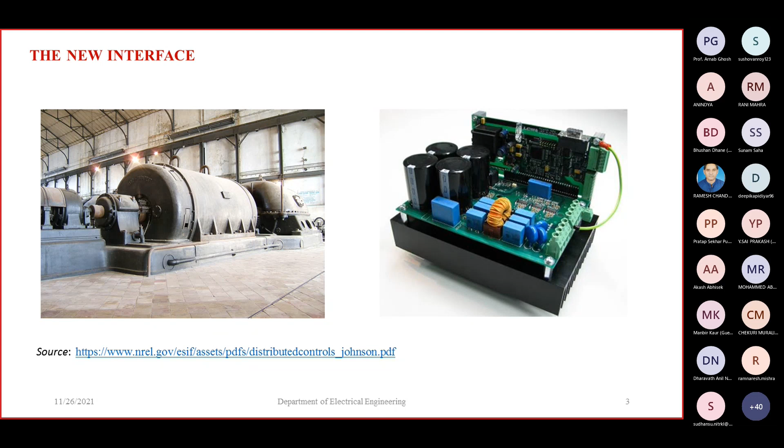So the new interface is, we will replace the synchronous generators with these inverters, but the rating of the inverter—now I'm showing the scaling. In conventional synchronous generators the rating is very high, for example 210 megawatt, 500 megawatt, 1000 megawatt. But the rating of the inverter is almost 1 megawatt to maximum 2 megawatt. So we have to scale those things to match the

rating of the system, and location. We know the location of the synchronous generator in conventional power system, and the inverter's location is near to distribution, at low voltage and medium voltage distribution level.

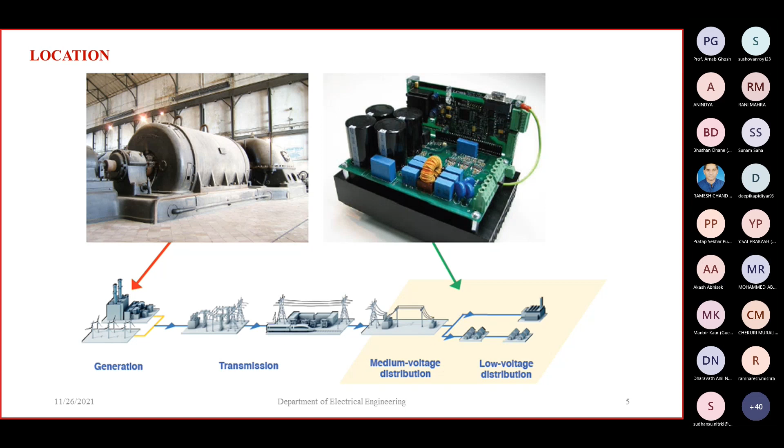Coming to implementation of the inverters, here you can understand the implementation. After the filter we can measure the voltage and current signals, and the analog to digital converter will convert the analog signal into digital. The microcontroller will process the signals and give the pulse width modulation signals to the power semiconductors, giving the desired amplitude and frequency at the output of the inverter.

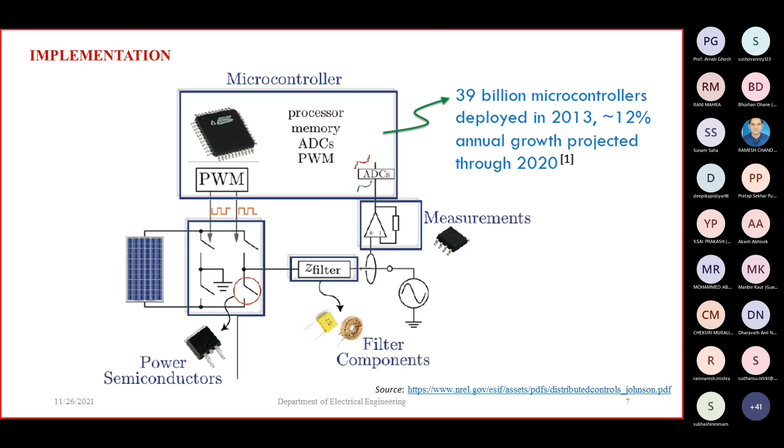Before going to droop control, I will first explain the inner voltage and current loops, which are very important. There are two types of inverters: grid following and grid forming. Nowadays the government is giving permission only for grid supporting or grid following inverters. In grid following inverters, there is just one PLL, which gives information regarding voltage, phase, frequency and phase angle. Accordingly, it injects some desired active and reactive power into the grid.

But in future our inverters will dominate the synchronous generators, so we have to form a grid using these voltage source converters or voltage source inverters. Now I am talking about one islanded inverter: how the current loop will work, how the voltage loop will work, and for parallel operation, which control method we will use. I will explain those things.

From figure 2, you see this is just a three-phase voltage source converter with LC filter. Here LF is the filter inductor and CF is the filter capacitor, and RF is the on-state resistance of the switch, ohmic loss of the inductor and ohmic loss of the switch, and this is the DC supply.

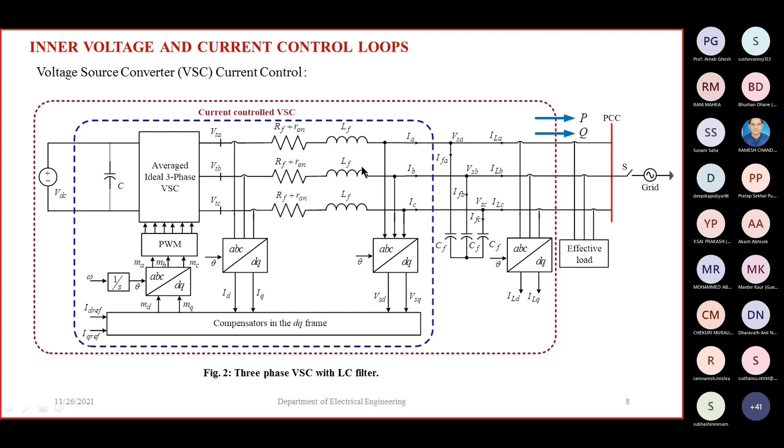First I will explain the current control loop. Applying KVL across the three-phase filter inductor, we can get equation 1. Here the terminal voltage is VTA and the PCC voltage is VSA. Applying KVL, VTA minus VSA equals LF into dIA by dt plus IA into the equivalent resistance. You can see this in equation 1.

Then we transform these equations from ABC to DQ frame. We do this because the PI controller is not able to follow a sinusoidal reference without error, so we would lose the simplicity and robustness of the PI controller. That's why we transform ABC to DQ. In the DQ frame, those signals are DC, so we can utilize the PI controller easily. Equation 2 shows equation 1 in the DQ frame.

After performing Laplace transform on the equations, we get equation 3. Equation 3 shows the physical system equations, and equation 4 shows the control law. This control law you can understand from the next slide, the current control block diagram. I will briefly explain how this control law is designed and why we are taking these equations, and the relation between input and output in an inverter: V equal to M into VDC by 2.

Like in a buck converter we know the output is D into VDC, V out equal to D into V in. Similarly here also the output voltage is equal to M into VDC by 2. M is the modulation index.

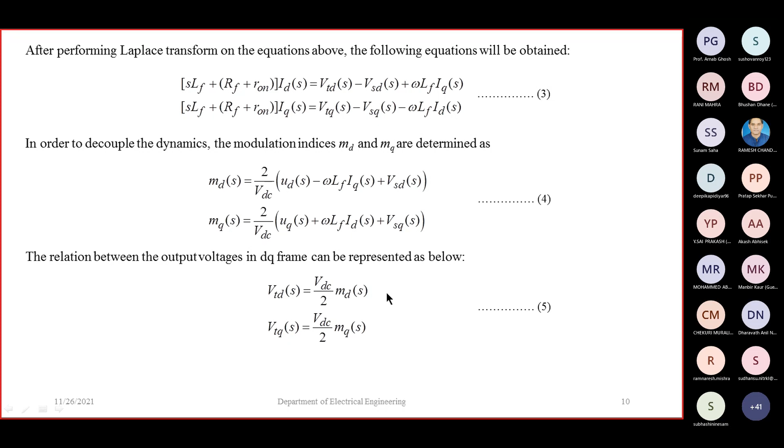Figure 3 shows the control block diagram of the current control voltage source converter in the DQ reference frame. The red box shows the physical system, AC side dynamics. I already showed how these equations came: first we apply KVL, then transform into DQ, then apply Laplace transform. From these equations you can see ID is depending upon IQ, and IQ is depending upon ID.

So there is a coupling between the state variables, and we have to eliminate that coupling. The controller can do this. In the control law, the decoupling term is there.

Actually, the controller will give one control signal. You can see the PI controller here. It will give one control signal, but we are adding two feed forward schemes. One is one feed forward scheme, and the other is another feed forward scheme. So in this control law we are putting two extra terms: one is the decoupling term and another is the disturbance term.

VSD of S is the disturbance. For example, if some load is changed, VSD will change. Because of this feed forward path, the controller can immediately understand something has changed, so it can act immediately. By this feed forward technique, the response of the system is fast. If you remove this term and run it, you can understand the difference between with and without the feed forward term, and how much time the system response will take.

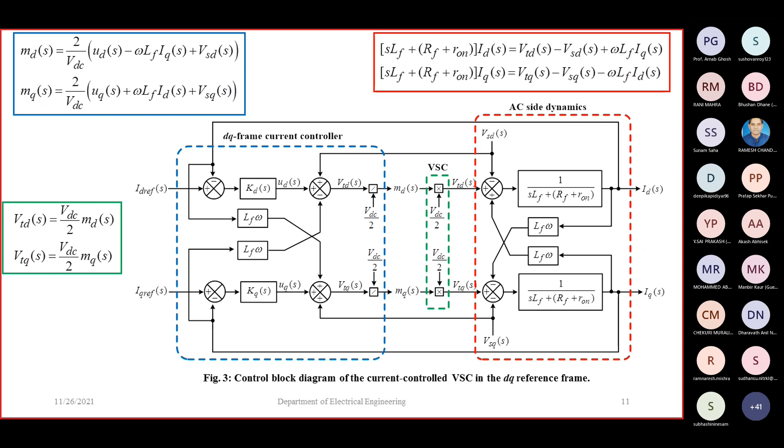As I told you, the multi-input multi-output system becomes two individual single-input single-output systems. In the next slide I will explain how to design these compensator parameters. You can see KD and KQ here, the two PI compensators.

Hello. Okay, you please carry on. Okay sir, okay sir.

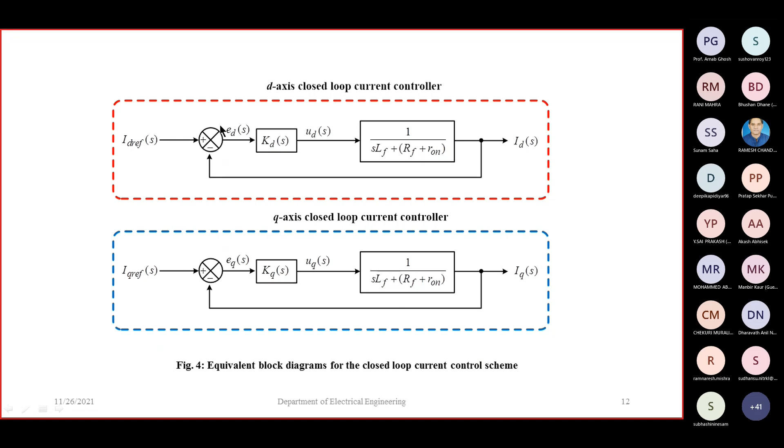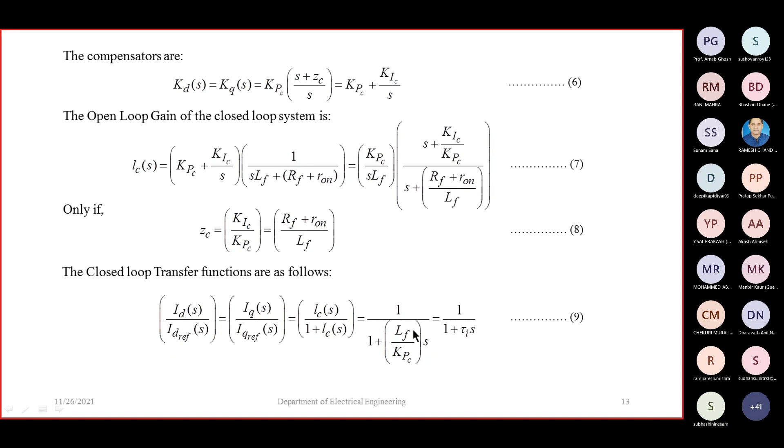So KD and KQ are the PI compensators, those are KPC plus KIC by S. The open loop gain of the closed loop system, you can see here, you can understand this is the open loop gain of this closed loop system obtained from this system. And the closed loop transfer function of the system you can see in equation 9. Here, the relation tau I is LF by KPC. So the KP and KI values depend upon the filter parameters and the time constant of the system.

Tau i is LF by KPC. Typically the range of the time constant is 0.5 to 5 milliseconds. Suppose LF is 8 millihenry and the equivalent resistance is 32 milliohm, and tau i is 1 millisecond. Now you can see KPC is equal to LF by TI, so the KP value is 8. And KI we can get from RF plus R on by TI, so the KI value is 32.

So based on the filter parameters, we can get these KP and KI values. I think you understand these KP KI values in the current control loop.

Now I will go to the next loop, the voltage control loop. Here the ID reference and IQ reference come from the voltage control loop. Now I'm going to explain about the voltage control loop.

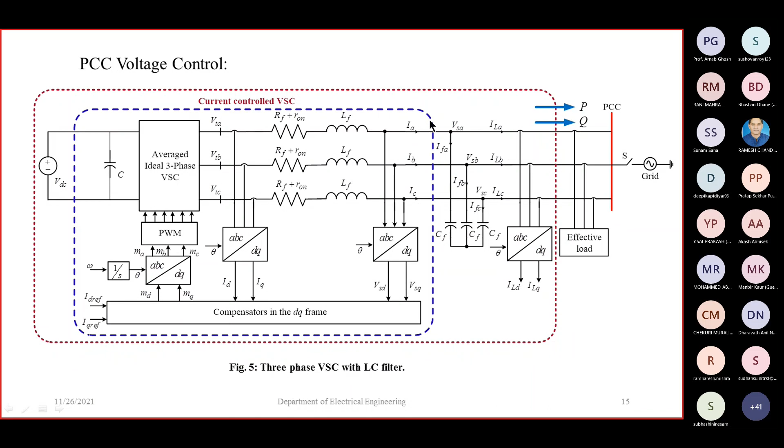Here is the same diagram. I am applying KCL at the three-phase AC filter capacitor. Apply KCL here: IA equal to IFA plus the load side current ILA. So IFA equal to IA minus ILA. The IF is CF into dV by dt. We know all these basics. So similarly here also we can get these equations in ABC frame.

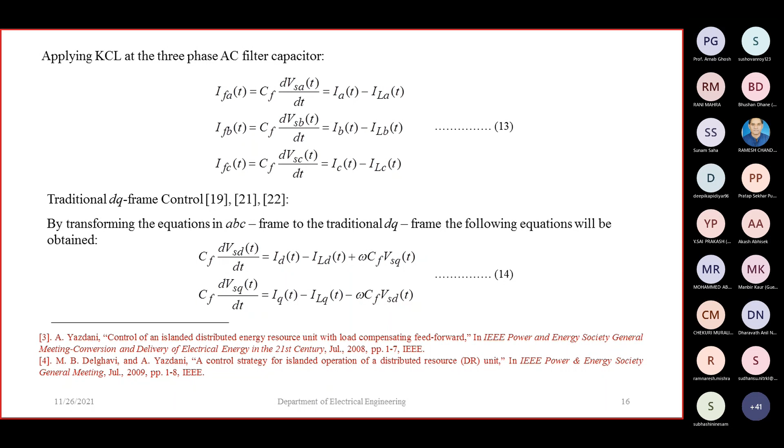Now we are converting ABC to DQ, and in the same way I'm designing another control law to decide a specific voltage and frequency.

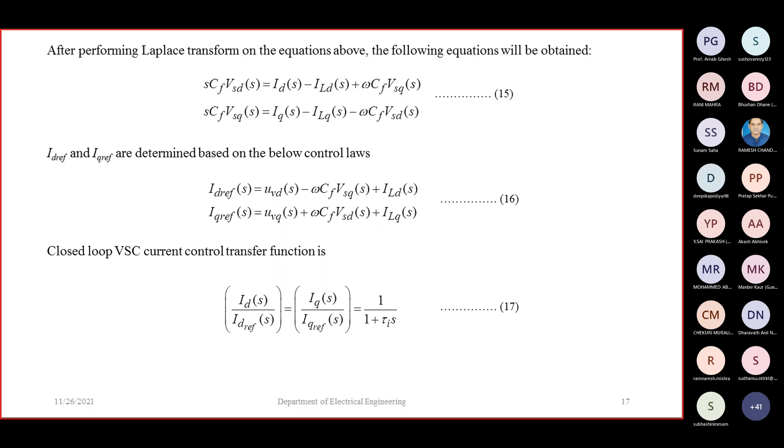Similarly, we already derived the closed loop voltage source current transfer function in the previous slides, which I have taken here in equation 17 - the same block diagram. Here also, this is the physical system, the AC filter capacitor dynamics.

So here VSD and VSQ are coupled. In the physical system, there is coupling between the variables. So you can see here also I'm eliminating this coupling term.

Then I'm adding another feed forward scheme. If ILD changes - for example, the load is increased or decreased, something happens on the load side - it can immediately understand this because of the feed forward scheme, so the system response will increase. The feed forward scheme is like I explained in the current control block diagram - here also the same thing.

This closed loop voltage source current control, already derived in the previous slides, I am directly putting this here.

How to derive this control law of the voltage control we can understand from here: a normal controller would just give the control signal UVD, but here we are adding one or two more elements to decouple. Decoupling means the multi-input multi-output system becomes individual single-input single-output systems, and because of that, this feed forward scheme improves the system response.

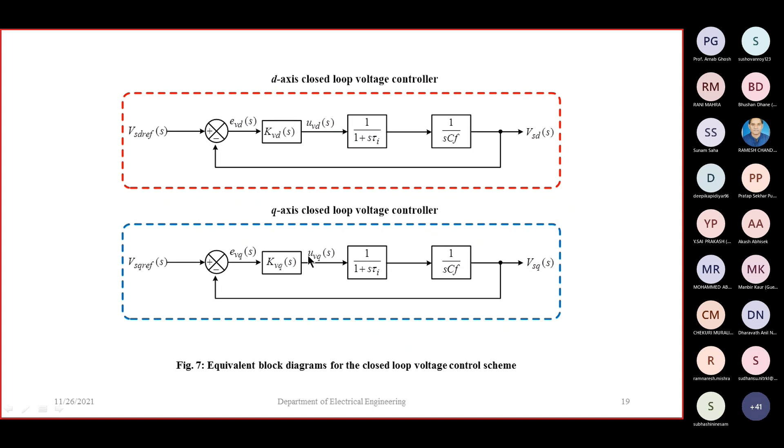Same way as the current control scheme - now this is two individual single-input single-output systems. Here also two PI compensators are there. I will show how to design these compensators in this slide.

These compensators are just KV, a proportional compensator only. Why am I taking only a proportional compensator? Because you can see the closed loop transfer function of this system in equation 19 - there is one pole. The open loop system already has one pole at the origin.

So it is more than sufficient for the compensator to be a pure proportional compensator - no need to go for a PI compensator, though if you want to design a PI compensator also you can, no issue. And we cannot use pure integral, because with pure integral, 1 by s square, there would be two poles at the origin.

The closed loop transfer function of the system you can see in equation 20 - here you have the transfer function. If you know the TI value and CF value, you can get a transfer function with some constant K. By using the SISO tool, you can get this K proportional constant.

By using the SISO tool you can draw, for example, a root locus. In root locus, if the gain varies from 0 to infinity, the characteristic equation poles will vary from one point to another. If you want a particular pole location, you can vary the KV value and keep the poles at that specific point, then take that KV value. By using the SISO tool, you can design this KV value.

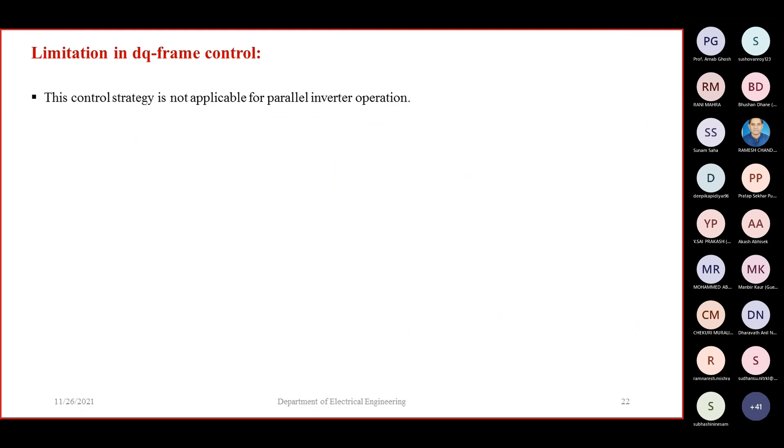And these are the results I will explain from my simulation. After simulation, I will explain the droop control. First, now I am going to show how to do the simulation up to the voltage and current loop. Then first I will explain those things.

I think if possible, you can also open your MATLAB and try it, and it will be good for you - you can understand it easily.

Now I'm opening the Simulink library - these are my components. First I will show how to design a physical system in MATLAB. First I need a DC voltage source. I have added this DC voltage source to my untitled model - yes, you can see here, this scheme.

And now, the next block is universal.

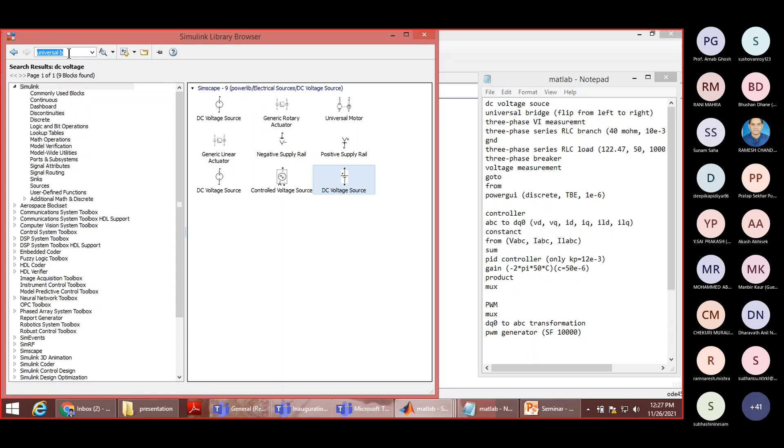Yeah, this is universal bridge. I'm using it, it will act like a three-phase voltage source converter.

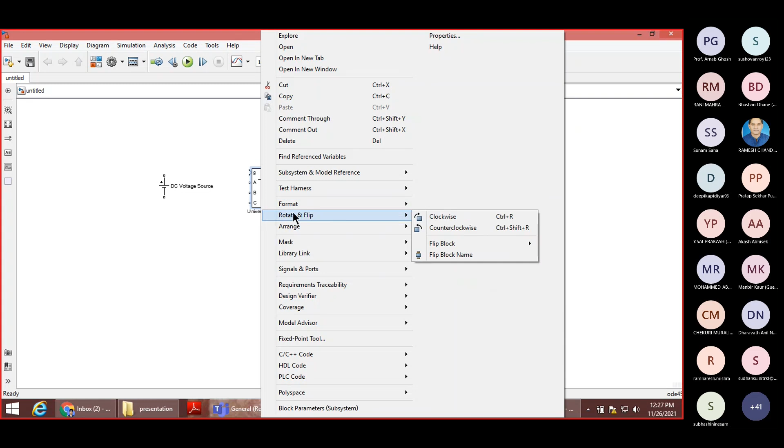Just flip it. Flip this block from left to right. Now I can easily connect these things.

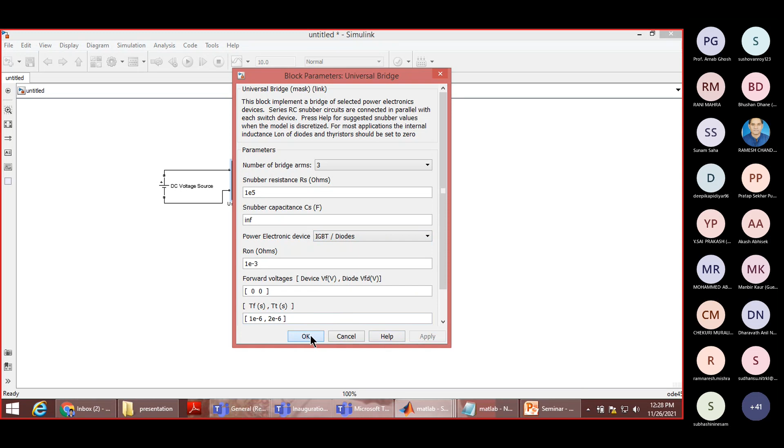Here there are 3 arms, and the power electronic devices, I will use the IGBT diodes. I will give the pulses here. Then I will use an LC filter. Then I will connect one breaker and apply some load.

Okay, now we have to design a filter. This is my simulator for the filter. Before that, I will use one three-phase measurement, a three-phase VI measurement.

And I need a three-phase series RLC. This RLC branch will act like a filter, and we need an RLC load also, and this block also.

And so we need a ground terminal also. Yeah, ground is here. I'm adding the ground, and I have taken the RLC load, and a three-phase breaker.

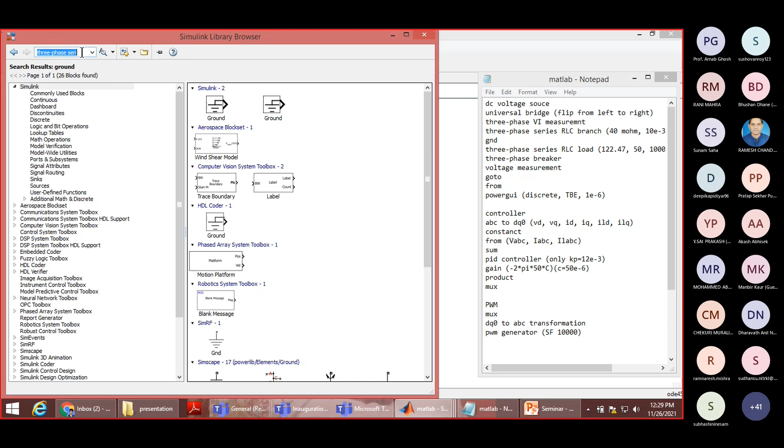We need a three-phase breaker, for adding and removing the loads we are using this three-phase breaker.

I have added this block also. Then I have one voltage measurement.

I need this block also. And then we need a goto, and I require this from also.

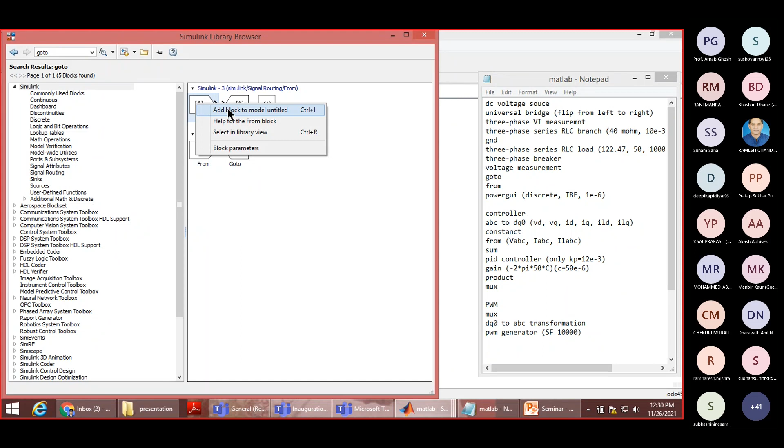These are just signal routing. And we need a powergui also. I'm adding the powergui also, yes, for the first time.

I need a breaker. I need a ground. At the terminal, I want to measure the VT and IT.

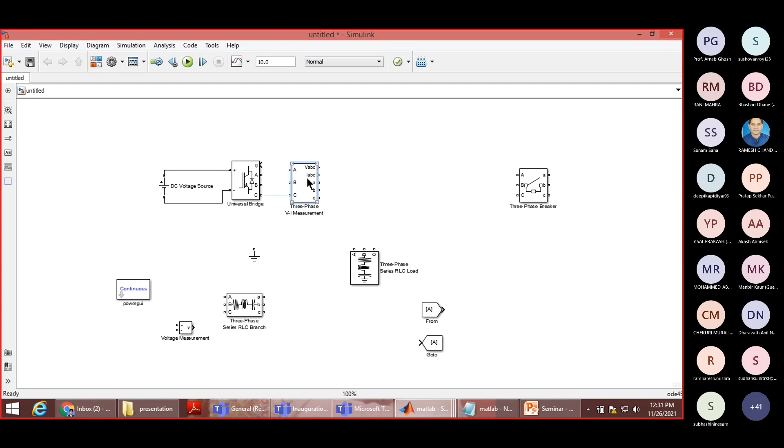So that's why I'm giving, I will use a label, some VT, and I will use a current label, some IT ABC. So at the terminal, that's why I'm giving IT and VT.

Now I'm connecting the three-phase VI measurement block. It will give the three-phase voltage and current. Here you want phase to phase or phase to ground, you can select here. So I'm using just phase to ground.

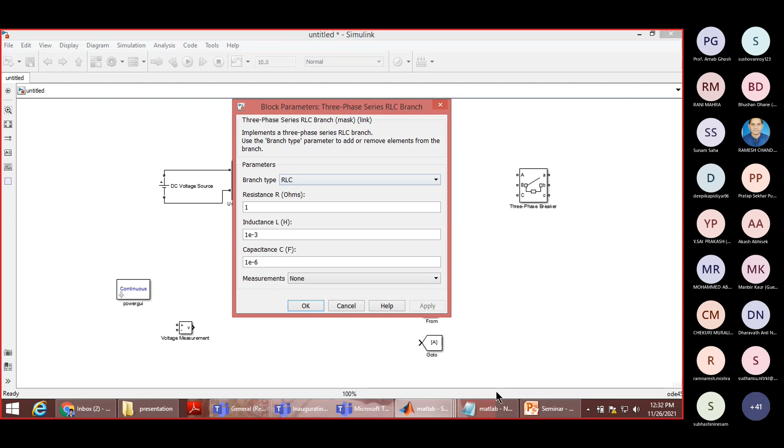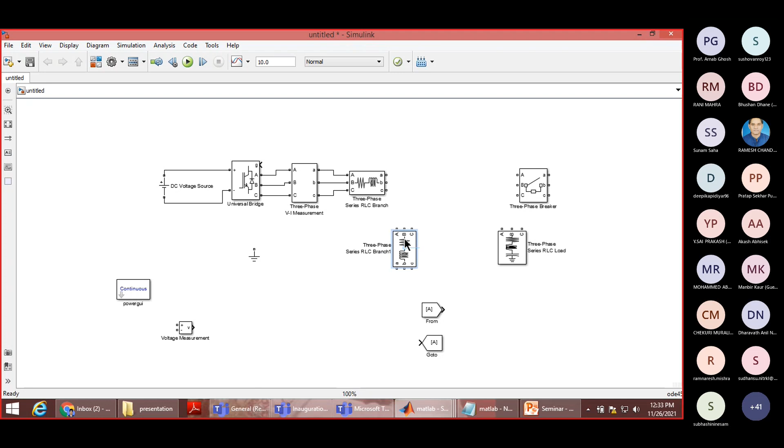Okay, I'm connecting this filter inductor with the equivalent resistance. Now this is the load. Now I will take another block for the capacitor, the filter capacitor.

This ground is required first to ground this. Okay, the filter inductor is over and filter capacitor is over. Now I connected the filter inductor and filter capacitor.

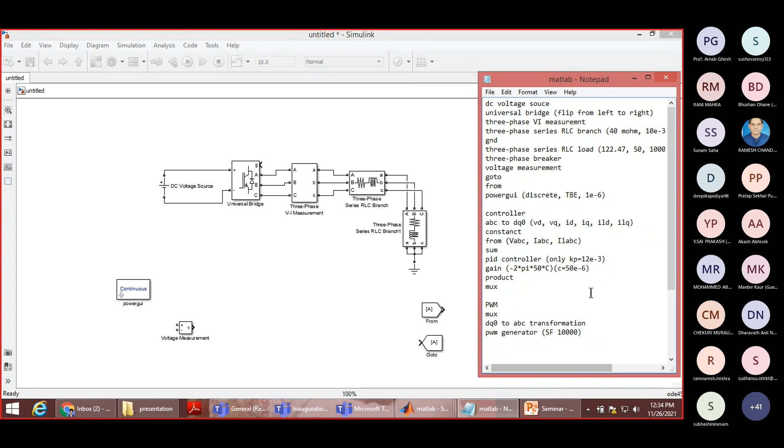The filter capacitor values are how much? 50. I consider a small resistance also, here also I'm considering just some 5 milliohm, and this is I think 50 microfarad. So yes, RC is just resistance and 50 microfarad, and the resistance is just I'm considering 5 milliohm parasitic resistance.

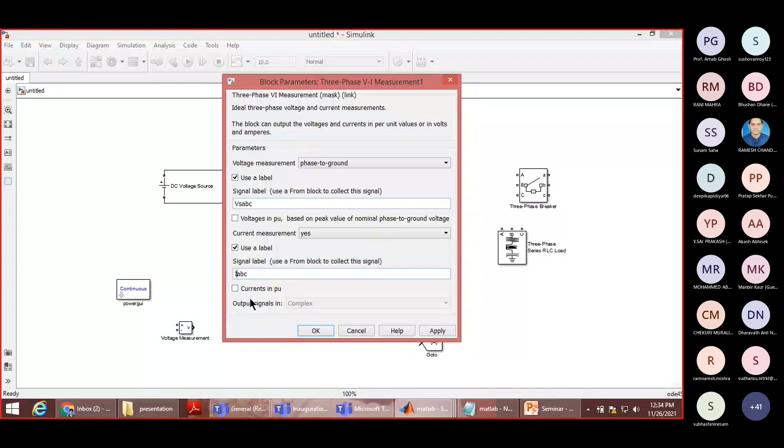And then I need one more VI measurement for the load side or some secondary side. Okay, VS ABC and IS ABC. So it will give the load side, or at the point of common coupling, it will give the voltage and current.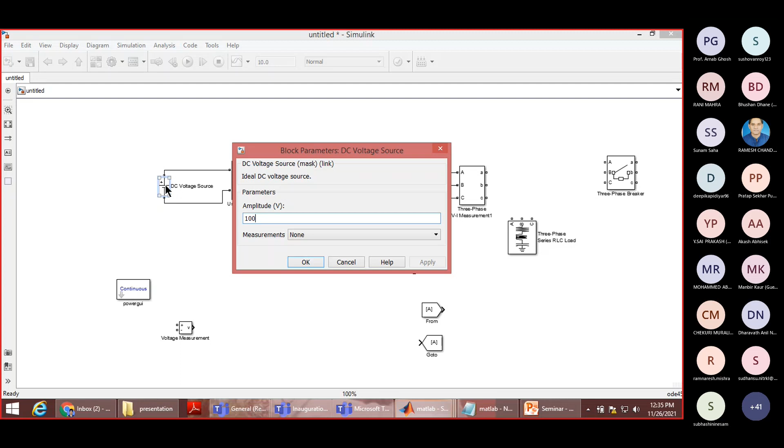Yeah, I have connected this block. Then we will connect the load. For the load, I'm just considering the output voltage is just 100 volts. For that I'm considering just 240 volts DC supply, and the load parameters also.

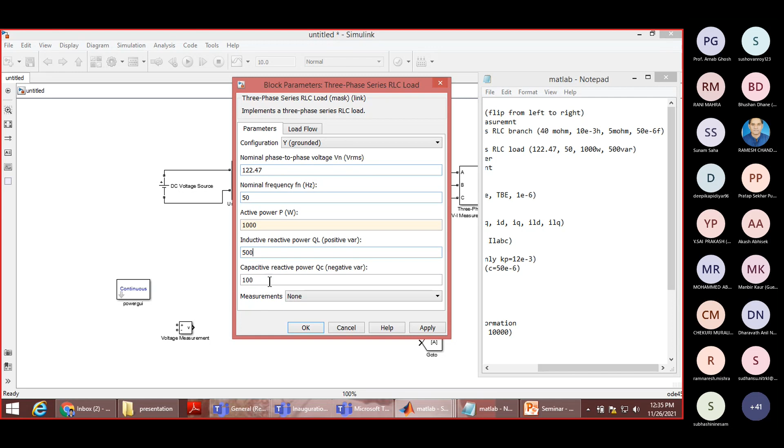Yeah, this is my load. A to A, connect A to A, B to B, C to C. Then I'm using a three-phase breaker.

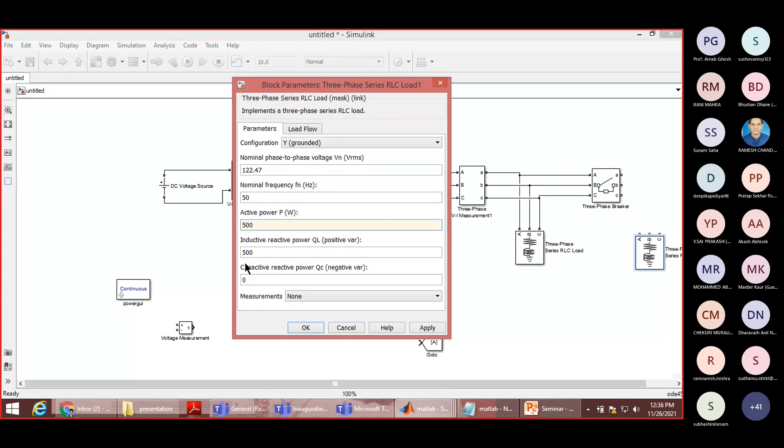Yeah, the three-phase breaker will be useful, it can break and take the load, and otherwise it can add the load also. I'm adding some 500 watt, some 250, so it's just a 50% increase in load.

I want to add this load after, for example, I started my simulation and it is running at 0.3 seconds. I want, for example, at 0.5 seconds to add this load, so you can set the time. Initially it is open, if it is closed, initially closed. So I am putting it as initially open.

I'm giving the time at, for example, 0.4 second, extra load will come, and again at 0.6 seconds the load will be gone. In between that time, on the secondary, the right side of the breaker, some load is there that will come at 0.4 second and disappear at 0.6 seconds. So initially it's open, meaning the load is not connected initially. After 0.4 second it will be connected, and after 0.6 seconds again the breaker will open.

That's it. You can give the external signal also. If given, some external signal will come, so that if we are giving that external signal, the breaker will turn on and off based upon the external signal. Now I'm just internally generating two signals to turn the breaker on and off. Yeah, that's it.

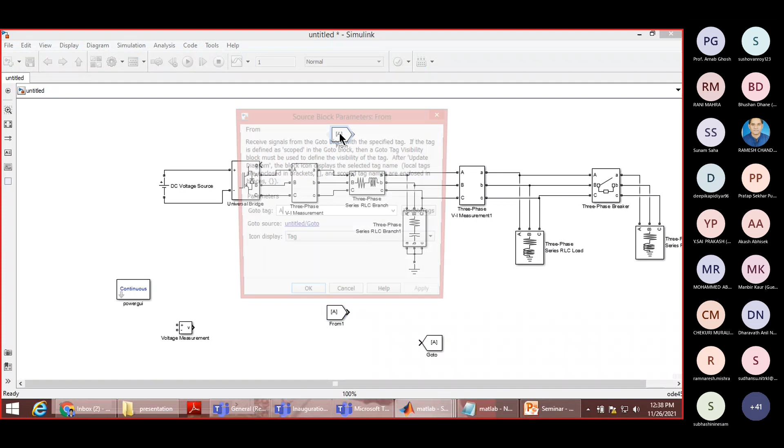I think this is a physical system. I want just one second. Yeah, so this is the physical system. Now I have to give this... now I want to generate pulses. Pulses, okay.

Now I will discuss the controller, how to design it. In the previous slides I explained the feed forward schemes: one is the load side voltage we will detect, and the load side current we will detect, and we will use those sensor signals also in the controller.

And initially for islanding mode, you can fix, for example, in this mode I want some 100 volts, the V phase max is 100 volts on the output side, so I'm expecting 50 Hz. The V phase max is 100 volt that I'm expecting. For that I need to design a controller, so we need a current control loop and voltage controller, the inner current controller and the outer voltage controller. Now I'm talking about that.

Now I will show the simulation of these voltage and current control loops. For that I'm giving... for controller, first we need ABC to DQ transformation. First we need constant inputs, I want to give 100 volts and 50 hertz. We need a constant block, yeah, this is constant.

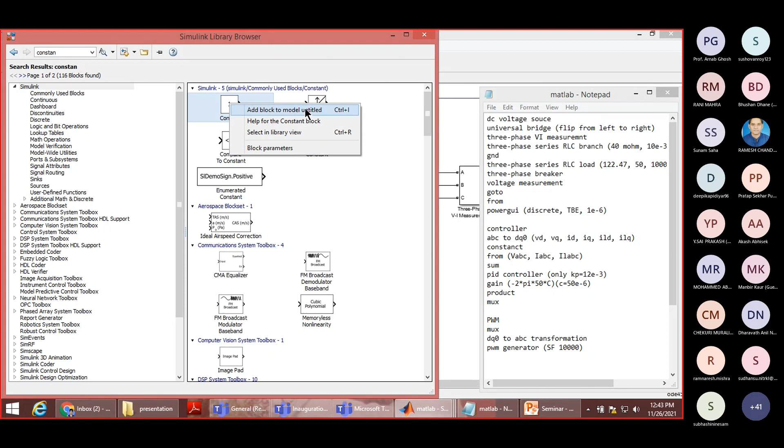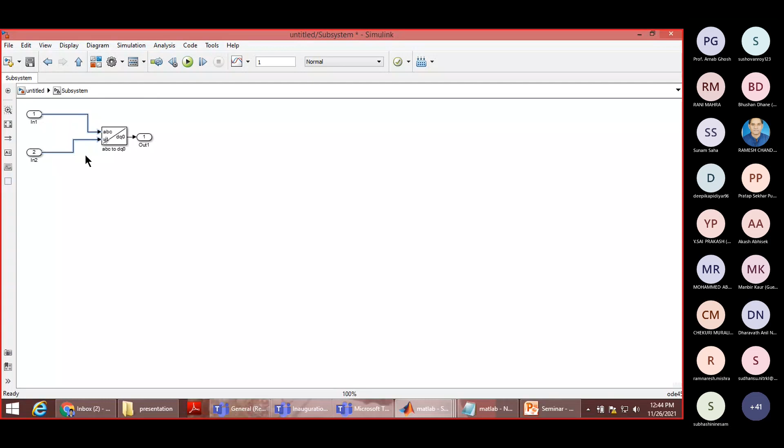I'm just normally connecting to create a subsystem. Now I want to create one subsystem. These are the two inputs. You can remove it. Remove the output out.

Here I will create another subsystem. First I will do the, in this another subsystem I will create the voltage controller.

Voltage controller required the VD star, put one is the VD star 100 volts and frequency. I need another... one input is sufficient.

Right. This is just for frequency, for phase angle.

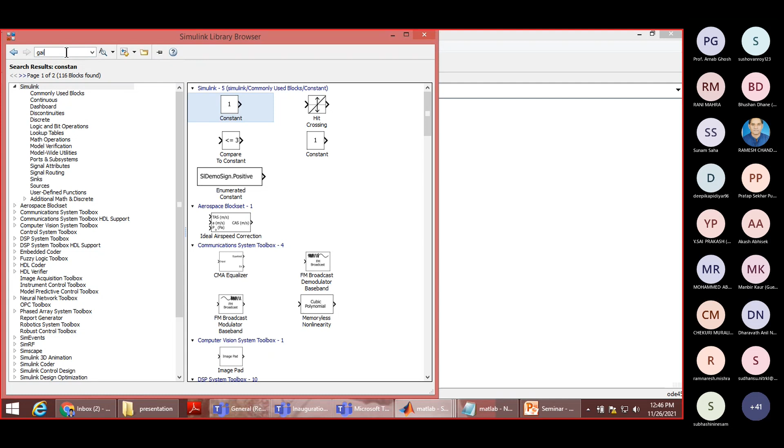First I'm getting the phase angle. Yeah, this is gain block. And I apply, then I will use one integrator.

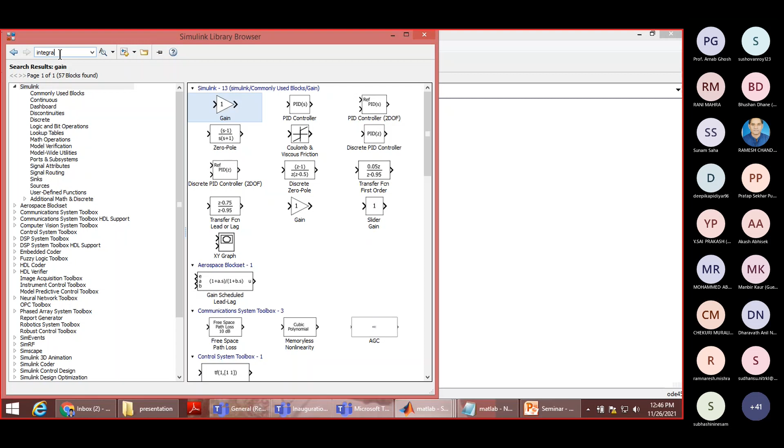Yeah, here integrator is there. If you integrate this omega, you can get the theta out, or you can use, yeah, this is... what is this? This is frequency, this is voltage control loop.

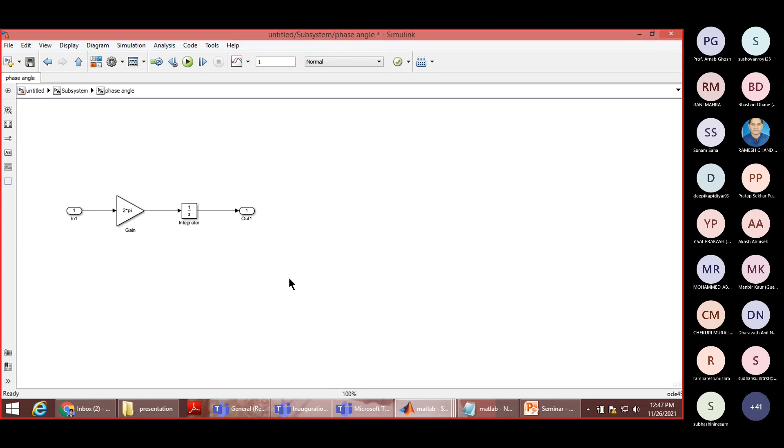50, and I want the go-to block. This is phase angle, so...

And I want to give globally. I will use this omega t in so many cases. Yeah, so I actually need this omega t. That's why I first done this thing.

Phase angle I got. Once you got the phase angle, now I want to... you can see in the voltage control loop here, we need VD. So from VABC we can get VD and VQ.

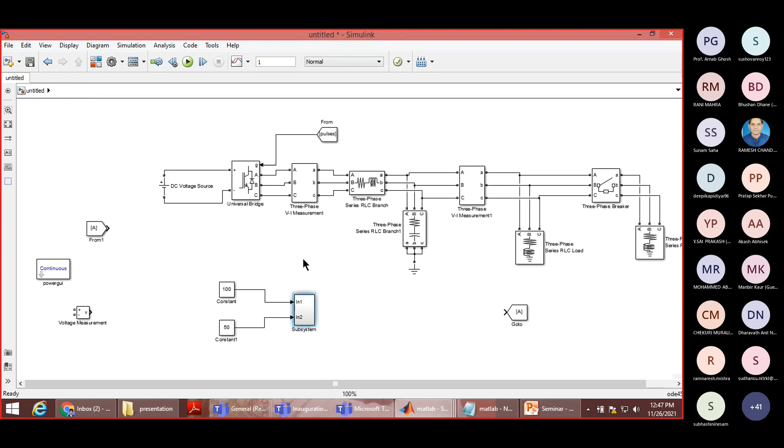Okay, from this block ABC to DQ, I can get VD, VQ. First, for that I need from block. Where is the from? Yeah, here one from is there. I want this block. I need VABC, VD, VQ.

So VD, VQ means I think we update. Yeah, I got this VABC. I want the omega T also. Already omega T is there.

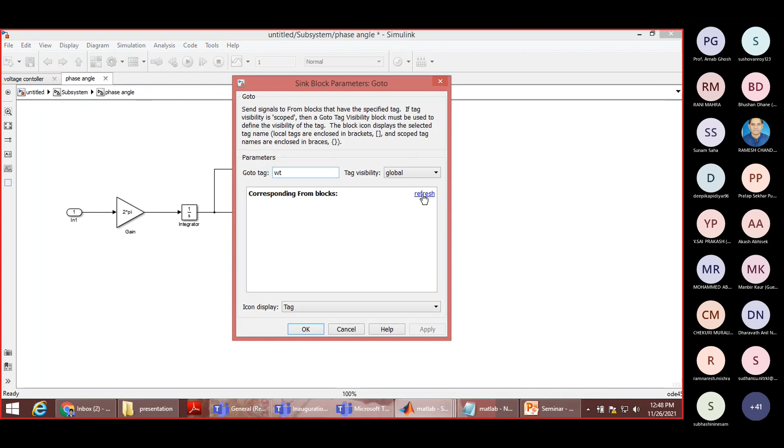I update this thing. Already omega T is there. Here omega T is there. Update. Apply. So I got the omega T.

So without this phase angle, we cannot get this VD and VQ. Okay, now I want one demux. Here DQ0, three things are there. For that I need a demux.

A demux we need. I want actually the VD, VQ and V0. I don't want the V0. That's why I will terminate that thing. And where is that?

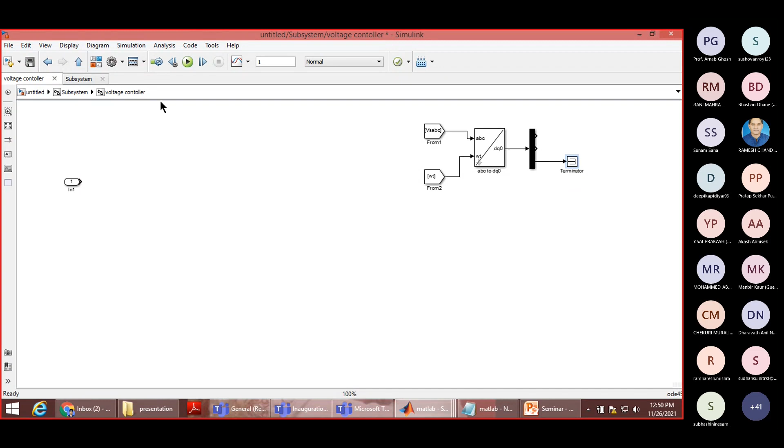Terminator. I don't want this thing, and I want VD, VQ. That we need go to block. Yeah, we need go to block.

Go to, yes, one go to block is there, and the go to block for VQ. Yes, this is V is VQ. Similarly you can design another thing.

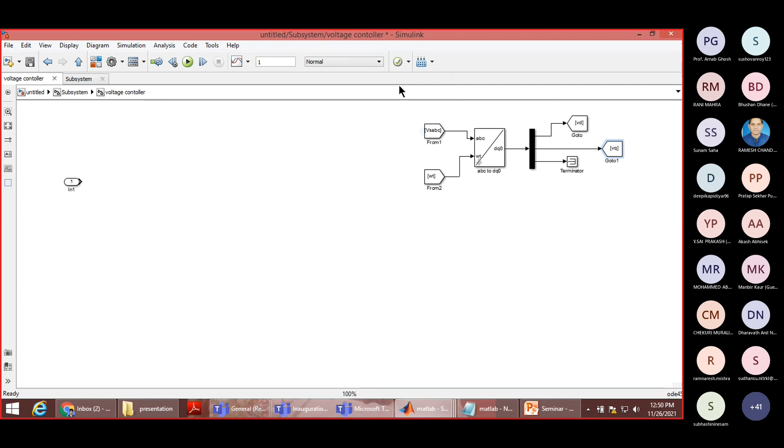Yes, this is ISABC. Okay, ISABC, omega T, you can get ID. Yes, and we need IQ. Yes, we can get the VD, VQ, ID, IQ.

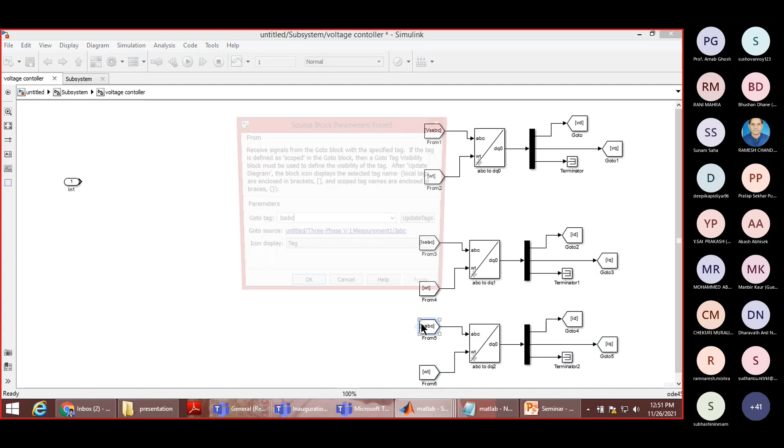And we need one more block also, that is just for, we have VSABC also, we need... yeah, sorry, ISABC. So for that, that will give some ITD and ITQ.

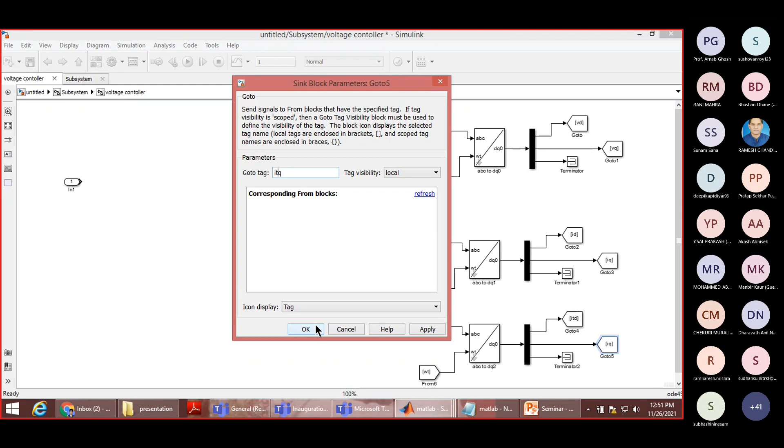These things I will use voltage and current control loops. That's why first I am from the VI measurement from the three phase, now I am converting ABC to DQ. It will give VD and VQ, ID and IQ.

You can see this block diagram. I'm fixing the VD star is 100 and the VD is coming from the VSABC. Similarly, I'm keeping the VQ is actually the VQ reference. I'm keeping 0.

For actually you can take, the VT is depending upon the root over VD square plus VQ square. If you keep the VQ as 0, the whole value, VT is equal to VD. So for simplicity, I am taking that case. You can take any case.

You can take some VD by root 2 and VQ by root 2. Like that also you can take. For simplicity, I am considering the whole output voltage in terms of VD only.

So, I think we have less time.

I've already designed the whole system for voltage and current control and the phase angle. I've previously done my simulation. I will explain and run it to show some results because the session time is limited, so it's difficult to show each and every block in the voltage loop and current control loop. That's why I already made a simulation model. Now I will explain the things, show some results, then briefly explain the loop control and conclude the session.

Now, this physical system, I told how to design. For three phase to two phase conversion, we are using these blocks. By using a normal integrator, sometimes the result may not come properly, that's why I'm using this different integrator instead. You can take a screenshot if you want this one. If you use this, you can get better results.

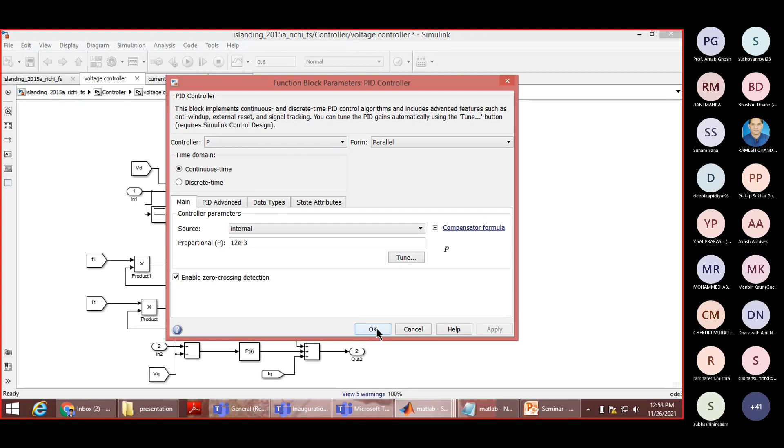Coming to the voltage controller, this is nothing but a PID controller. You can search in the library browser to get this PID block. This is a sum block, and this is also a sum block. VD sum is there, PI compensator, and here we have 2 pi FC. Omega means 2 pi F, that is 2 pi FC, with F here.

Similarly, these are the feed forward schemes. You can see these two: one feed forward scheme, and the other one is from this VD, giving another feed forward scheme. So from this you can understand it.

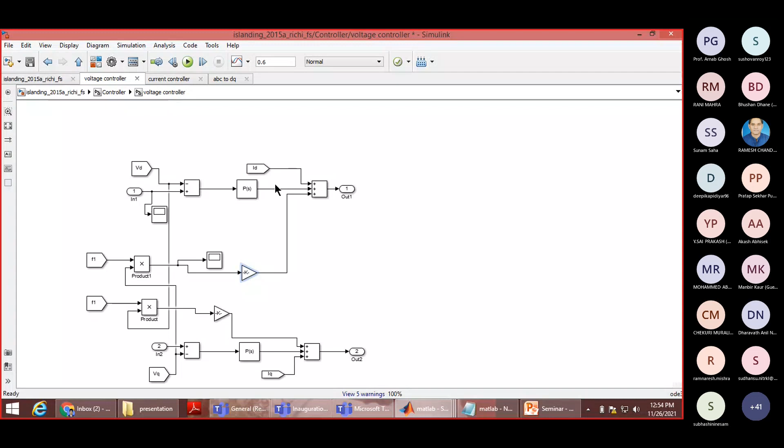This is the voltage control loop, and I already explained how to design this KP value. From this we can get the ID reference and IQ reference. So in this current control loop, I get this ID reference and IQ reference from the voltage control loop.

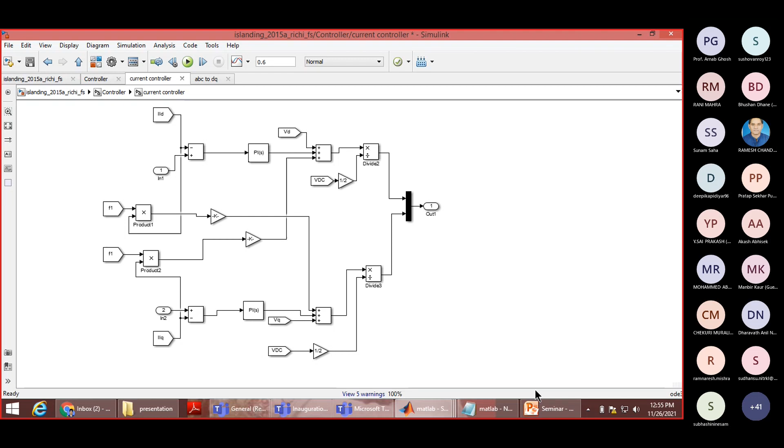Now you can see this block. I already clearly explained in the slides how to do this current control block. Here also there are two feed forward schemes, with the same PI compensator. This is just for gain, the inverter gain, where output equals M into VDC by 2, that's why VDC by 2 is coming.

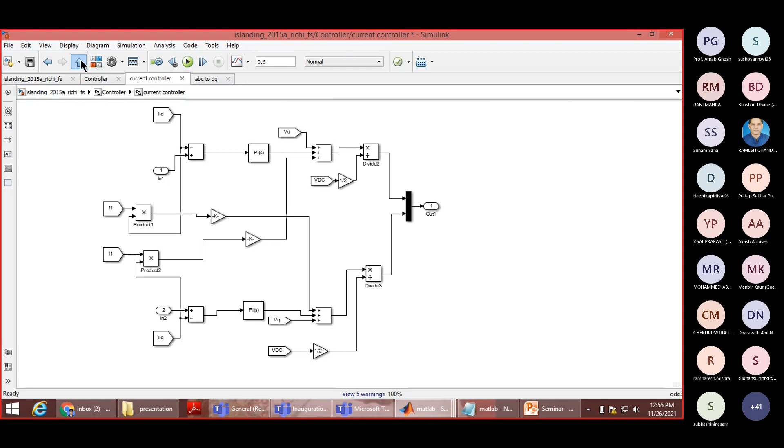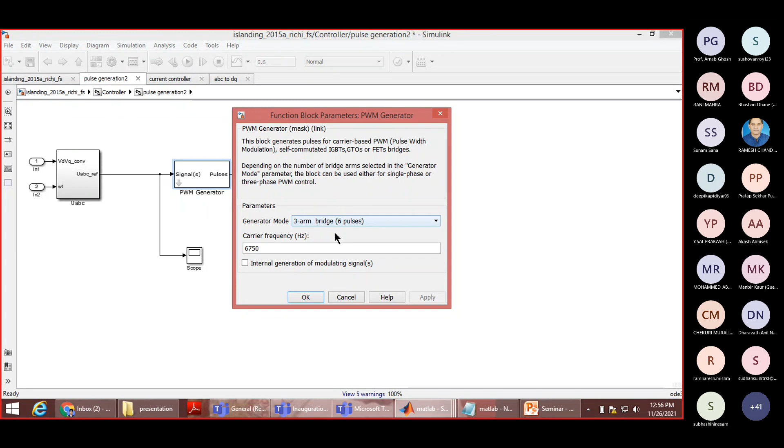Then I think we get MD and MQ here, and I want to generate the PWM. This whole block is for PWM pulse generation. We have VD and VQ, and that's why we are using this DQ to ABC conversion to get MA, MB, MC, the modulation indices in the ABC frame. This is directly the pulse generator block, where you can get 3-phase, 6 pulses needed since we are using a 3-phase bridge, along with this unit delay.

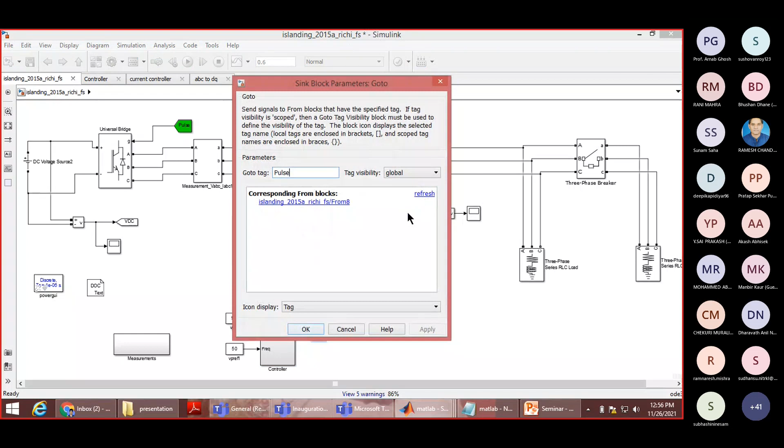You can get this. These pulses go to this block, and this is the from block, from this controller.

Actually, in the future, the plan is to have one inverter with one microcontroller, another inverter with another microcontroller, and so on, forming a grid, like how the grid now has all synchronous generators connected in parallel operating properly. But currently this technique doesn't exist physically, and the government standards for grid-connected voltage source inverters haven't been met yet, so we cannot connect to the grid until we meet the standards. In the final slides I will explain what is required to form a microgrid using the voltage source inverter.

This controller will be implemented in the microcontroller, and by using sensors we can get the voltage and currents, then convert analog to digital. The microcontroller operates in digital form and gives the pulses. Then we use gate drivers, which are physical systems. In the digital platform everything is just signal level, very low strength, so the gate driver is needed at power level to drive the inverter. If you give the direct signal, the inverter cannot operate, so gate drivers are required.

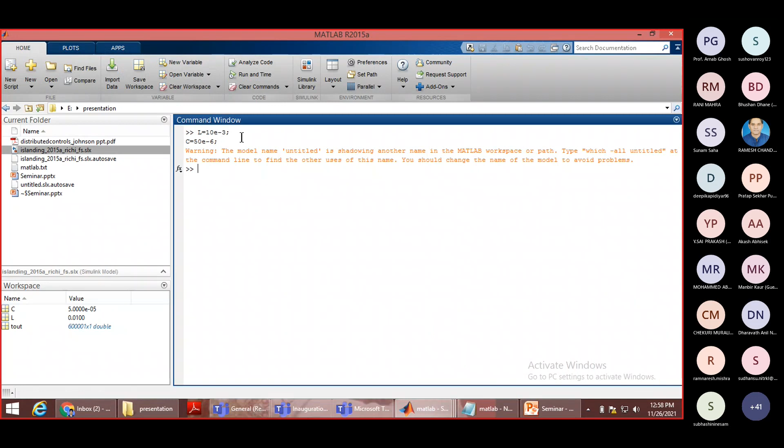Now I want to explain how this actually works. First I will run this and explain. This is a doc block, used if you want to save any data here, you can copy it. I'm just saving the data of L and C. I can copy here with Control C and paste in the command window. I already copied and pasted it, so that block is useful for saving any data.

Here I'm giving just discrete level. If you want to go for hardware, you have to do the simulation in fixed step only. That's why the sample time here is 1 microsecond, and you can check whether it is fixed step or variable step from the configuration parameters. This is fixed step, using solver ode3, and the step size is 1 microsecond.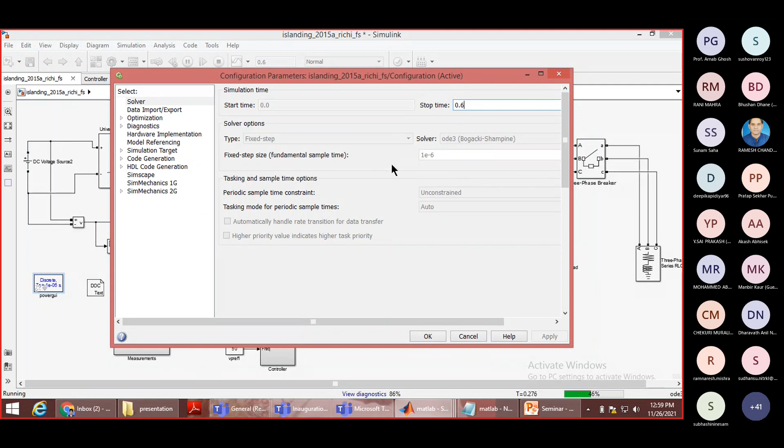The problem is microcontrollers still find it very difficult to achieve this 1 microsecond step size. That's why experts rethink about these microcontrollers to give the best ones suitable for grid forming inverters. If the step size is high, these microcontrollers are unable to give the pulses properly.

So much research is required to frame an inverter based microgrid, that microgrid will mimic our conventional grid. It is very difficult, many things are there to meet these requirements. These are just at research level, that is what I am telling.

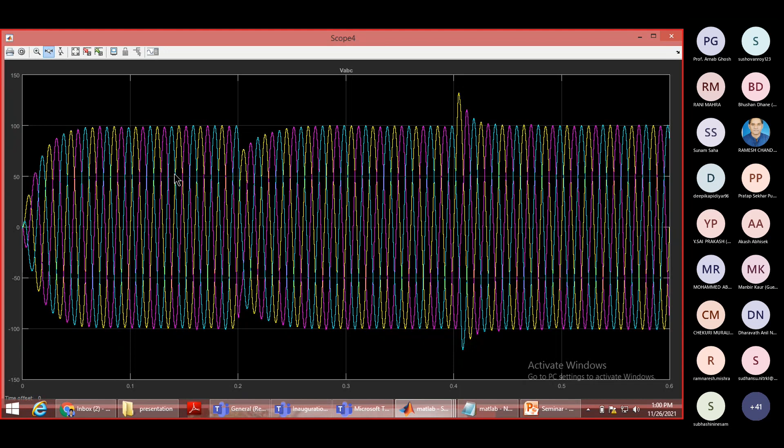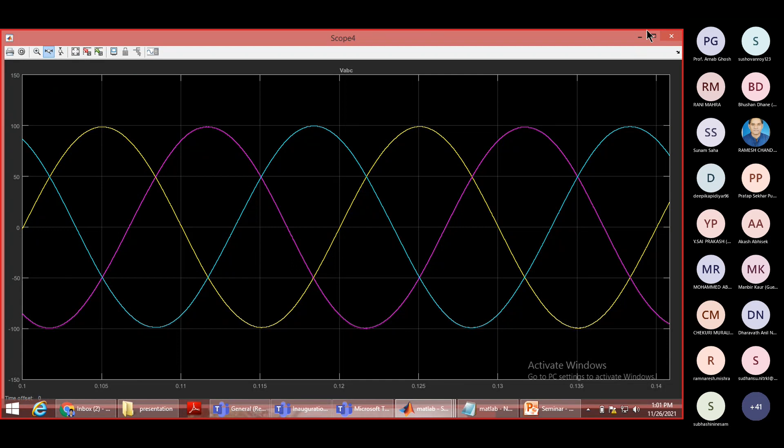You can see the voltage immediately, perfectly sinusoidal, and you can check the frequency also. From 0.115 to 0.135, that's 20 milliseconds, which is 50 Hz.

You can clearly see this VD. I told already VQ is 0 and VD is 100. If the load is changed, there is a dip, and if the load is changed again, there is an increment, not a dip.

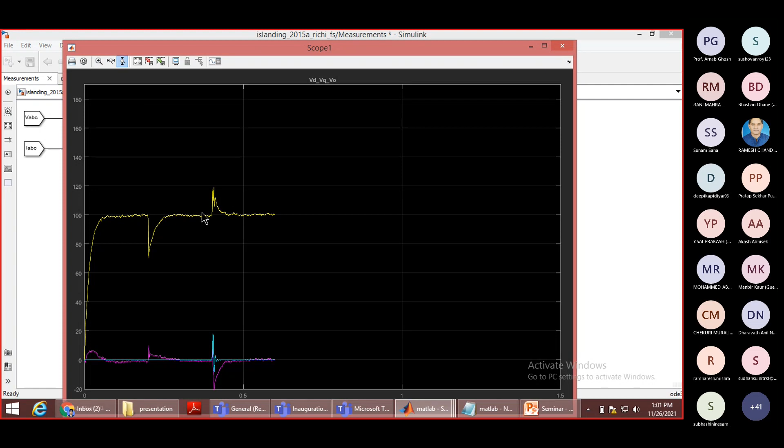For VD, VQ, and if you want to see ID, IQ — if the load is increased, the current will increase. You can see here, the ID, if the load is changed, ID is increased.

You can see the line voltage here, within 1 cycle, 2 cycles, it will reach steady state value within 2 cycles. The controller is very fast.

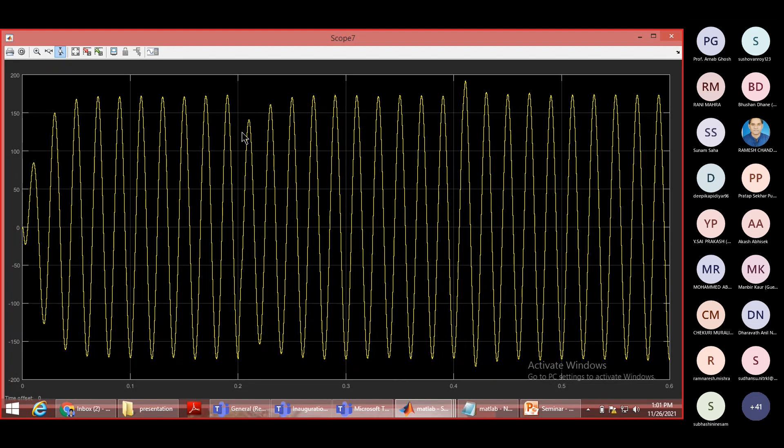This is the simulation of the single inverter in islanding mode, and you can connect it to the grid as well. Now I want to talk about grid forming inverters, not grid following or grid supporting. Grid forming means these inverters will operate in parallel, and together they will make a grid that mimics our conventional grid. That is the objective of this presentation.

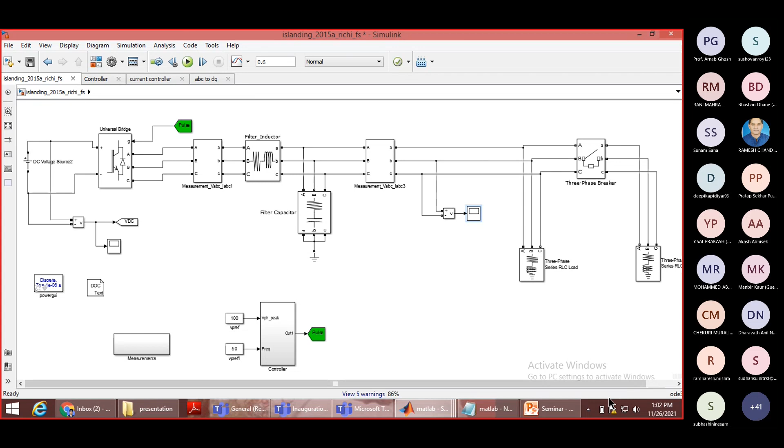Now I will go to the simulation of droop control. Droop control is realized by simulating the characteristics of the conventional synchronous generator, controlling the output voltage and frequency of the voltage source inverter according to the variation of output power. This control strategy is based on inverter parallel connection technology, with benefits of simple reliability and high flexibility. From equations 21 and 22, you can see the relations between frequency and active power, and voltage and reactive power droop relations, which you may already be aware of, but not know how to implement.

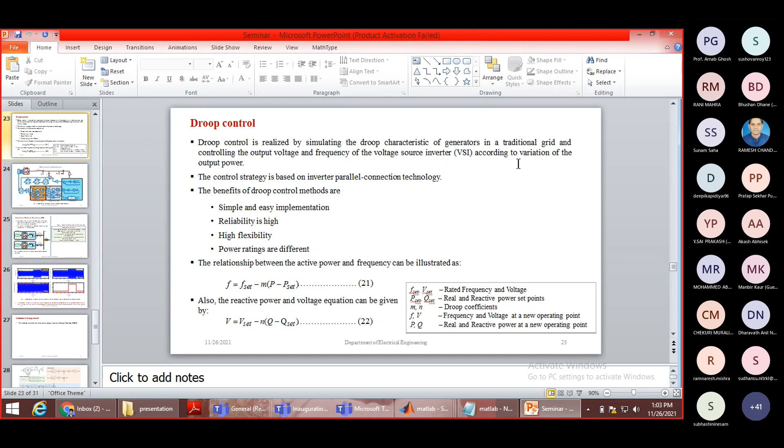Now I'm going to show the implementation. Based on those equations you can implement these things simply. I will show you how to implement these things as well.

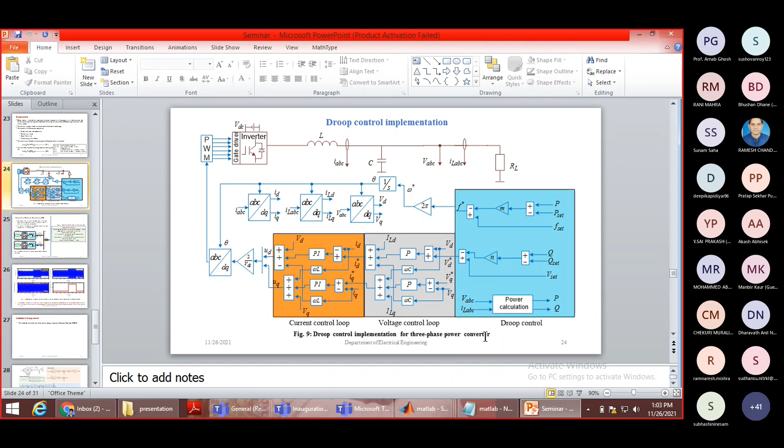The limitation of Droop control is if there's a sudden change in active power, the frequency will suddenly fall down, meaning the rate of change of frequency is high. In a conventional power system, if the rate of change of frequency is too high, there's a chance the circuit breaker will trip, thinking it's a fault. So the frequency should not fall suddenly. This is the limitation.

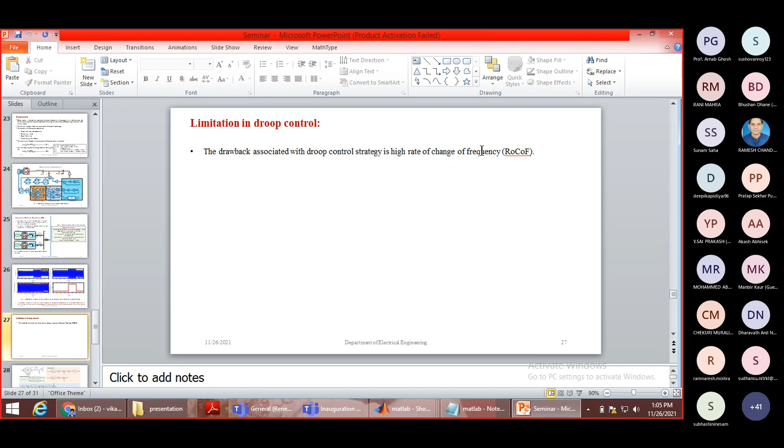Now I want to explain how to do the simulation of this Droop control and power management. First we will see the Droop control block diagram.

This diagram is taken from a paper recently published in August 2021 by the National University of Singapore. The authors talk about these Droop control inverters as an educational control design project. They developed a course on parallel inverter technology, considering three-phase inverters connected in parallel.

In their laboratory, they build a setup. In BTech we study conventional power systems, protection, and power system analysis, but we don't learn about voltage source inverter technology at that time.

So they are making a small power system model. In that model there are no synchronous generators; the inverters mimic the synchronous generator to form a grid. They made a course on this inverter technology, and if you are interested, you can go through this paper to understand it. I have taken this block diagram from that paper.

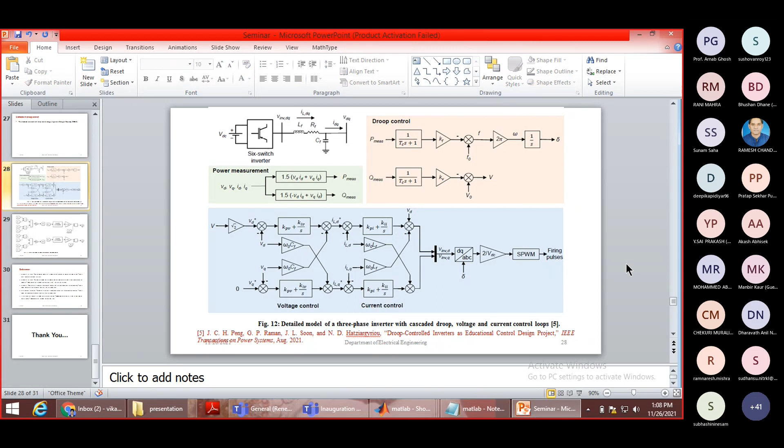If you are interested, you can go through reference 5, from which you can take all the parameter values and try to implement it. I have explained the voltage and current control loops clearly, and how to derive the PM, QM, F reference, and V reference. If you download that paper and try to implement it yourself, you will get more confidence, and you'll be able to read and implement any Droop paper easily. These are my references.

Before concluding this session, I want to explain some major challenges. Our goal is to transform the conventional power system into a new power system where synchronous generators are replaced with voltage source inverters. So the main challenge is protection: synchronous machines provide a relatively large short circuit current to trip protection.

Synchronous machines can withstand large overcurrents, but power electronics, being semiconductor devices, cannot handle large overcurrents. So we have to rethink how protection is done, and fault ride-through is another issue, particularly in grid forming inverters because they act like voltage sources. If there is a fault, a dead short circuit occurs and huge currents will flow.

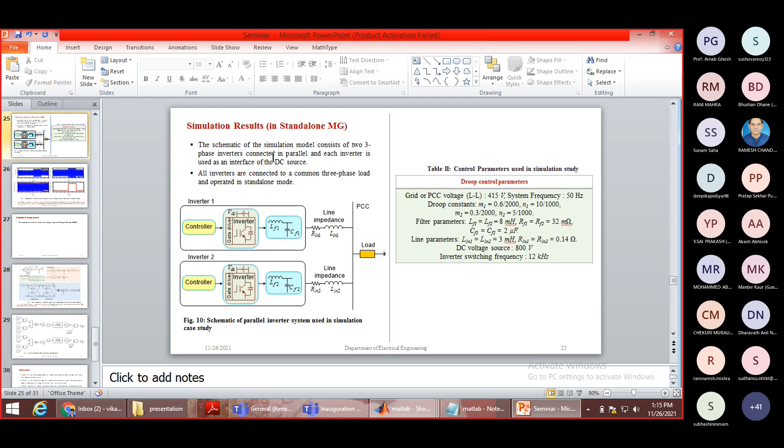Yeah, so here you can see the droop constant. You can understand if one is 0.6 and the other 0.3, the droop constants are in a 1:2 ratio, that's why my currents are also in a 1:2 ratio. If you keep it 1:1, your currents will be the same. So based on these droop coefficients, you can get the sharing, like in conventional power systems. This is simple, just go through how conventional synchronous machines share in the same way.